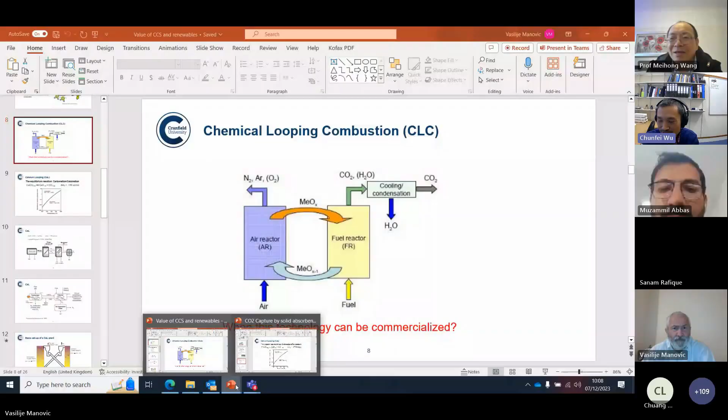So Professor Manovic, thanks, and yeah, I can see your slide. Yeah, thank you, I'm just trying to set up everything so it works. Excellent, you can start.

Thank you again to Meihong for the good presentation, interesting with a lot of data, and for talking a bit in general about carbon capture and storage. I also wanted to give a brief introduction about carbon capture and storage, but I didn't want to repeat too much of what you already heard, so I was rearranging my slides during the previous presentation. First, let me introduce myself. I'm Vasilije Manovic, professor at Cranfield University since 2013.

Before that, I worked for 8 years in Canada for CanmetENERGY, which is a government research institute belonging formally to their Ministry of Natural Resources. Before that, I was working in Serbia, where I was born and got my PhD, and left in 2005 as a lecturer or assistant professor.

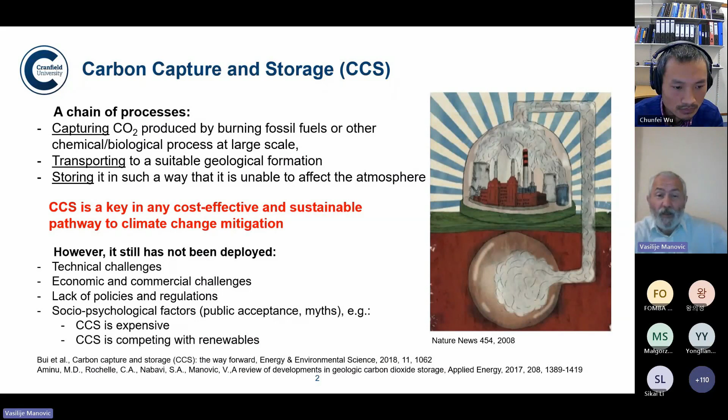And finally, social and psychological factors, such as public acceptance, or what I consider myths - that CCS is expensive, or that we have no technical solutions for CCS. Those are only myths, used by those proposing competing strategies - instead of CCS, we can do something else. You will often hear CCS is competing with renewables. It's a fact, yes, there is competition - competition for resources, competition for funding. But the goal is the same. CCS and renewables - we need both of them to achieve sustainable decarbonization of the economy. I will come to this point a bit later.

So why do we need CCS? I show this example, and I intentionally use something published 10 years ago - nothing has changed even now. For example, when you look at predictions from 2013, similar predictions hold now. The fact is that global electricity demand is growing. Renewables or nuclear can only partially solve issues related to increased carbon dioxide emissions.

Surprisingly, even if we talk about phasing off, or some calls now to ban fossil fuels totally - which would be simply impossible to run the economy by banning fossil fuels - regardless of all that, the reality is we still haven't reached the peak production of fossil fuels, although we are talking about reducing their extraction and use. In the future, it's expected we'll use even more natural gas, which also contributes to CO2 emissions if used for electricity generation.

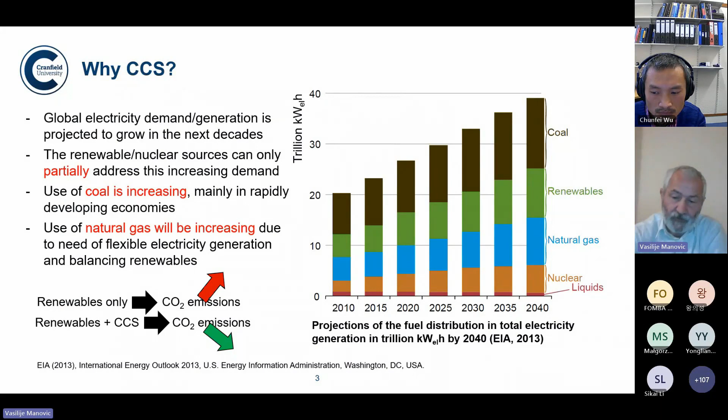This slide shows what we believed 10 years ago about CCS technologies we were considering. Even at that time, amine scrubbing, solvent-based scrubbing, was already commercialized technology. The technology I'll talk about today is solid sorbent-based CO2 capture. We believed that needed to be commercialized at least 7-8 years ago. You'll see later we're going towards commercialization of such solid sorbent-based technologies, but we're still not at the scale we wanted. There are other technologies too, and in general, I think with CCS we are behind the schedule we forecasted and wanted.

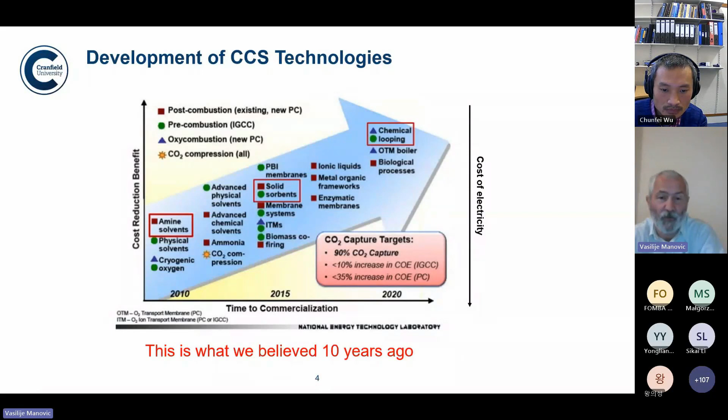You already saw this slide, so I won't talk much, but I want to put calcium looping technology in the context of how we consider carbon capture and storage. In post-combustion, we have a power plant generating heat, using that heat for a steam cycle to generate electricity. We do business as usual, and after that we have CO2 separation - this is the retrofitting scenario. We can have amine scrubbing, but also calcium looping, which is the second generation of carbon capture technologies. We wanted to develop second generation technologies to reduce costs and diversify capture technologies, because no single technology is best in all applications. So for post-combustion, we retrofit a capture plant that could be calcium looping based.

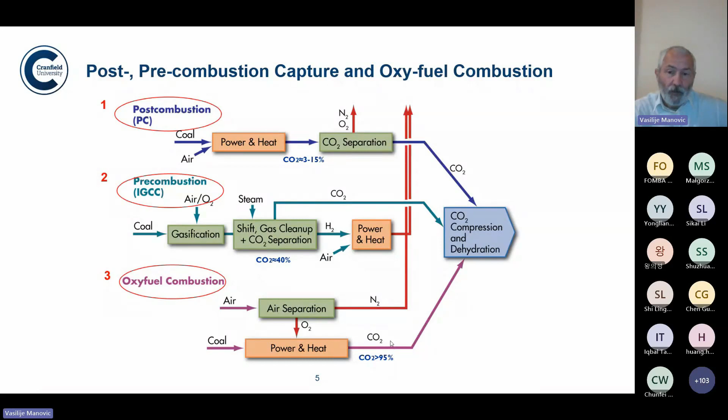When we talk about solid sorbents for CO2 capture, many have been considered and developed - you can find thousands of papers on different natural and synthetic sorbents. My aim isn't to discuss the many options found in thousands of published papers. I'd like to say that one important property of materials we use for carbon capture is their cost - that they're available, abundant, and environmentally friendly, so we're not using materials to capture CO2 while causing other environmental damage.

In calcium looping technology, we use limestone as a natural sorbent - 10% of sedimentary rocks are limestone. We can also use dolomite or magnesite, but limestone is simply the most tested and cheapest sorbent for CO2 capture in these processes. These processes are efficient - they can separate 95%+ of CO2, and their main advantage is low energy penalty for carbon capture, which we'll see later how. As I said, why develop second generation technologies like calcium looping when we already have commercialized carbon capture? Because we're looking to reduce costs. We have many solid sorbents usable at low and high temperatures, and calcium looping is a process where carbon capture happens at high temperature - 650 degrees - which is one of the advantages, and we'll talk about that in more detail.

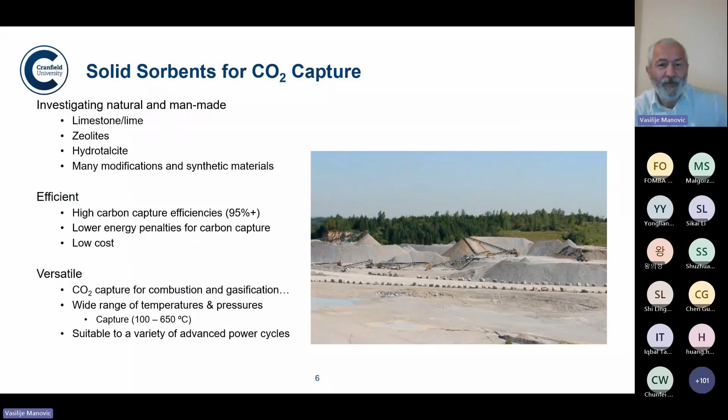So the process is relatively simple. It's based on a reversible chemical reaction of decomposition of calcium carbonate, producing calcium oxide, lime, and CO2.

So how do we run that process? This is a phase diagram of the system containing calcium oxide, carbon dioxide, and calcium carbonate. With increasing temperature, calcination reaction will be happening. With reducing temperature, we can run the reverse reaction.

Which we call carbonation. So usually in this process, depending on what CO2 concentration is in the gas we are processing, but for example, if CO2 concentration is 10%, we can go in carbonation. That means the reaction to capture CO2 can go up to 700 centigrade.

When considering calcination, we want a gas containing, say, 95% approximately CO2, and if you look, the minimum temperature must be somewhere here, which is 850. But that's from a thermodynamic point of view. From the point of view of kinetics of chemical reactions and the intensity of the process, we usually go up to 900 centigrade.

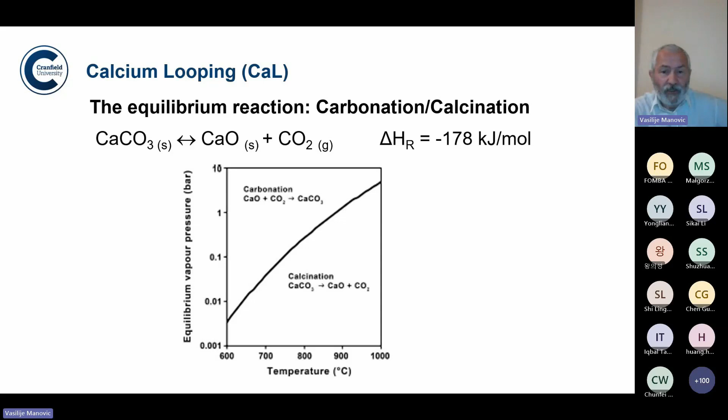We run sorbent regeneration reaction, which we call calcination. So the process is schematically presented here, and as you can see, we have two main reactors, which is carbonator and calciner.

In carbonator, we operate at 650 centigrade. In that reactor, we have calcium oxide reacting with CO2, and the saturated sorbent is basically what we call partially carbonated calcium oxide, because this reaction never fully happens - it's never going to reach 100% conversion. So that's one reactor.

We circulate material from carbonator to another reactor, which we operate at, as we said, 900 centigrade. In that reactor, we have decomposition of the partially carbonated calcium oxide. We decompose calcium carbonate and produce CO2.

CO2 now - we need to heat this reactor. We need 900 centigrade, and we cannot afford to heat this reactor like we usually do in a power plant, by air. We need pure oxygen, because if we have air and fuel here - coal, or it could be any fuel, natural gas, whatever - we need pure oxygen so that we don't dilute CO2 by feeding this reactor with air, because in that case we would produce a mixture of CO2 and nitrogen. We don't want that. We want, say, 95% plus CO2 produced.

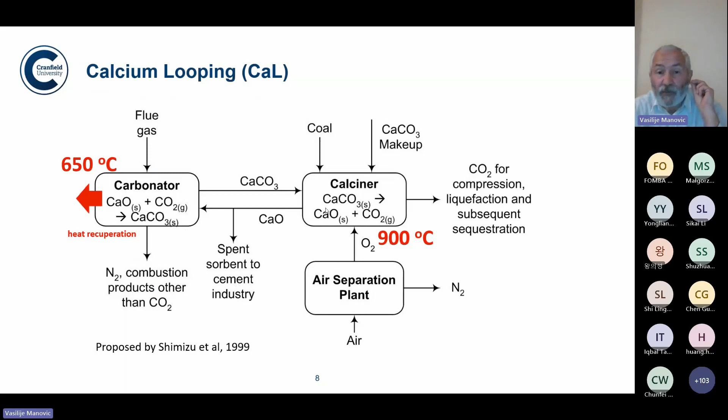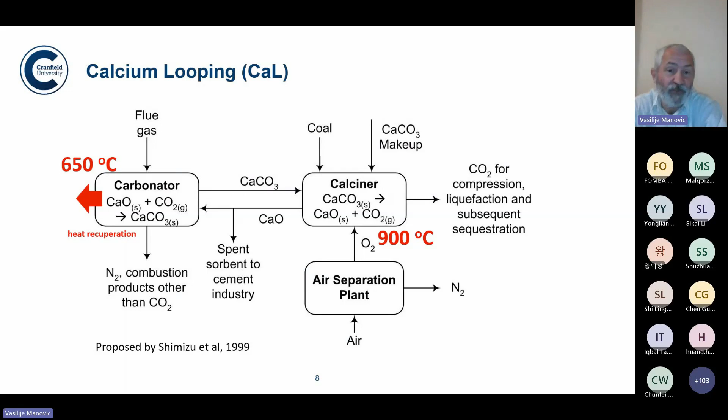A few synergies with other processes, as I said, such as the cement industry, iron and steel industry, because we are using the same process to decarbonize existing gases from those industries containing CO2, but waste from the calcium looping process we use as feedstock in that industry. So basically, in those scenarios, we even have no cost for sorbent because we just use that anyway in those processes.

So this is just a simple schematic representation of the process. Usually we have two fluid bed reactors, as we said, carbonator, feeding flue gas - or it can be any gas containing carbon dioxide. It reacts with calcium oxide, with solid particles of calcium oxide, and during that reaction, calcium carbonate is produced.

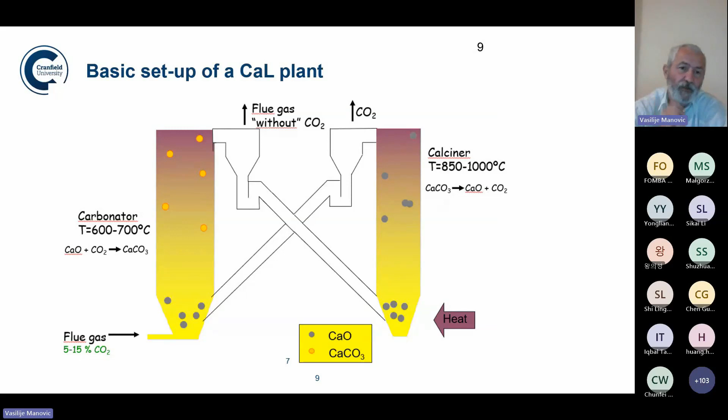In these transfer pipes, material is transferred to the calciner, where we need heat to increase the temperature, on the order of 900 degrees, and CO2 is produced. Solid material is then circulated back to the carbonator. That's a simple schematic representation of how the process basically works.

So what are the main challenges? First I'll mention some benefits. Already mentioned, inexpensive sorbent, usually considered to be around $10 per ton, so a very inexpensive material to be used for carbon capture.

The main components needed to design a calcium looping system are already commercially available. When I say main components, I mean fluid bed reactor systems. Another advantage is low projected cost for CO2 capture. Even during the previous presentation, I mentioned in some applications, 20 dollars per ton of CO2 avoided.

There's already been discussion during the previous presentation about how accurate we are about these costs. We've done probabilistic analysis of techno-economic studies of calcium looping. We are very accurate with process simulations, on the order of a few percentage points, but economic assumptions are critical. We compared this in one paper, published in Applied Energy in 2017.

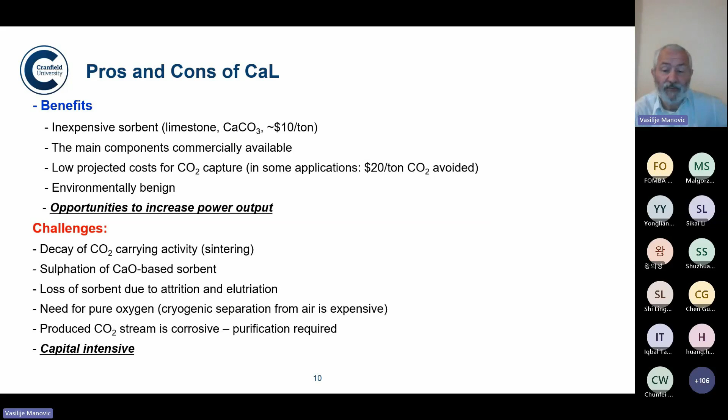This technology is also considered capital intensive, because you've coupled fluidized bed reactors, so it's not cheap to construct. But we will see again later, it's not necessarily always a capital intensive process. In some cases, we already have some reactors in the system that we can use, not necessarily always needing to build new reactors.

If you expose material to say even 1,000 cycles - there have been publications where researchers were testing material for 1,000 cycles - usually at the end, activity is 7-8%. So you cannot use material which is only 7-8% active. The solution was to make up always fresh material and to purge a portion of material from the process.

But this increases the cost of the process, especially in scenarios where we have no market to use that spent sorbent that we purge from the system. For example, in the case of power generation, we usually don't have the opportunity to use spent sorbent for something, and we need to think about other solutions.

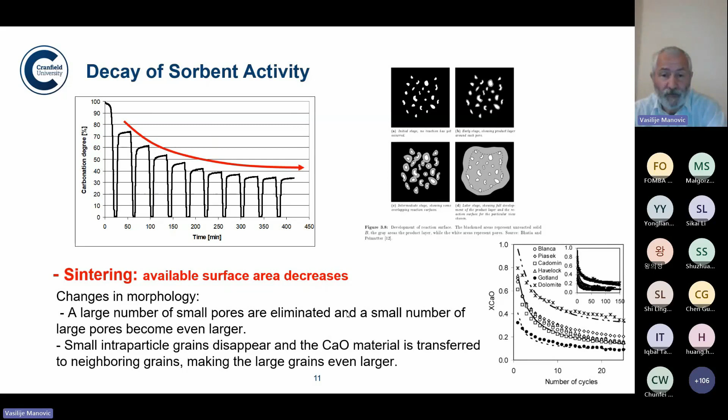Another interesting thing about solid-based sorbent, specifically calcium oxide, is that when we look at the kinetics of the reaction, we have two stages. At the beginning, if we expose calcium oxide at high temperature to CO2, it reacts very quickly in the first few minutes. But after that, there is almost no reaction, or a very slow reaction.

So at the beginning, we have a reaction rate controlled reaction, and when we are designing processes, we only consider this, because it would not be practical to wait for days or hours to capture a few more percentages of CO2. That second stage is slow and diffusion controlled.

So what's basically happening? Just imagine a surface of calcium oxide - doesn't matter how it looks, porous or just a flat surface. At that surface, when you start the reaction, you have direct access of CO2 molecules to calcium oxide. Therefore, quick reaction at the beginning.

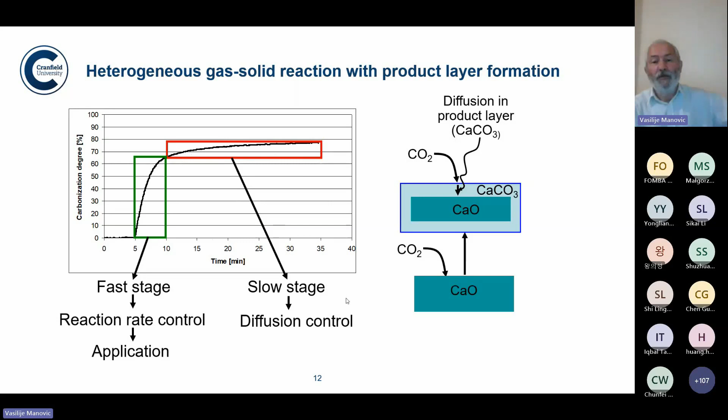So that's about sintering and loss of activity.

So from the point of view of CO2 capture using this sorbent, it's not a good thing to have sulfur dioxide. But if you already have sulfur dioxide, it's good news that in the system you have calcium oxide to remove that sulfur dioxide. This just means we would need a bit higher makeup ratio of fresh sorbent.

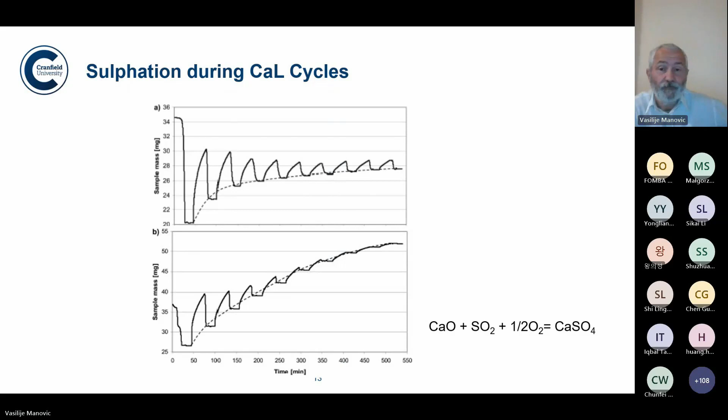Another possibility to recover the material, to increase activity after it's spent, is hydration. Just to give you some ideas of what we have been doing, how we were trying to improve material performance in the calcium looping system.

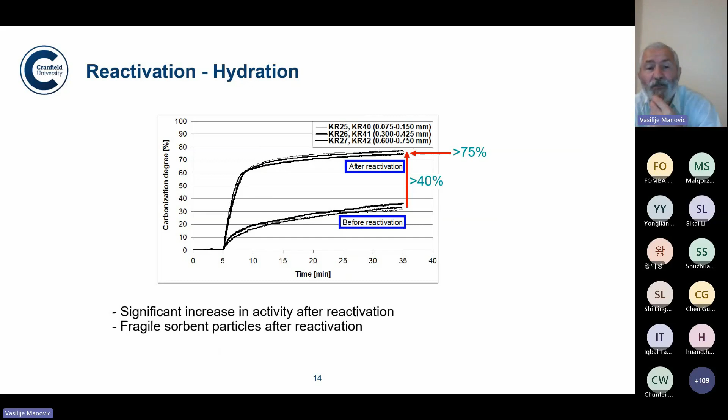The same samples, when exposed to steam, performed the same, if not better, than fresh material. So that was one of the main reactivation techniques we considered. But the main problem when you reactivate calcium oxide with steam is you get fragile, fluffy particles that you cannot handle in a fluid bed. It would be elutriated. So we needed something more to do, not only to hydrate and reactivate by hydration.

One idea was using pellets. That was one of the first tests, even just to try whether it would work at all, and we were doing that by hand, so you see some pellet particles. But when we found that it worked, we improved mechanical strength of particles and improved activity by hydration.

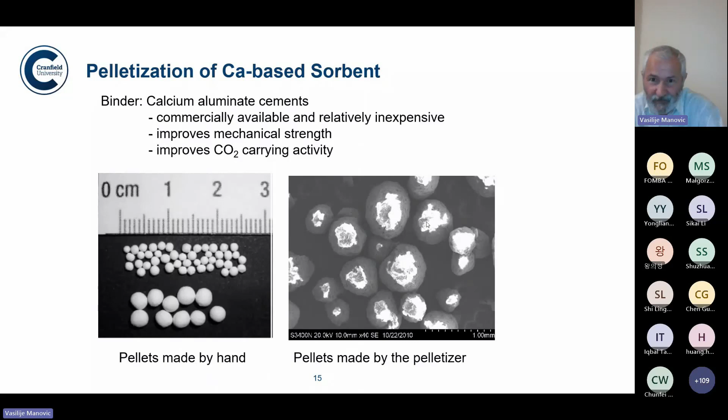We had commercially available and inexpensive binders we could also add to improve mechanical stability, such as calcium aluminate cements. We started producing this material in a kind of mechanical pelletizer, and you can see how it looks in this photo and schematic representation of the process. We have this vessel where we add the material we'd like to reactivate and pelletize. We have blades, one at the bottom and one on the side wall. With these blades we can control speed of rotation and how much water we're adding, and by those parameters we were able to control the particle size of material we were producing. Particle size of pellets is important if you have fluid bed systems.

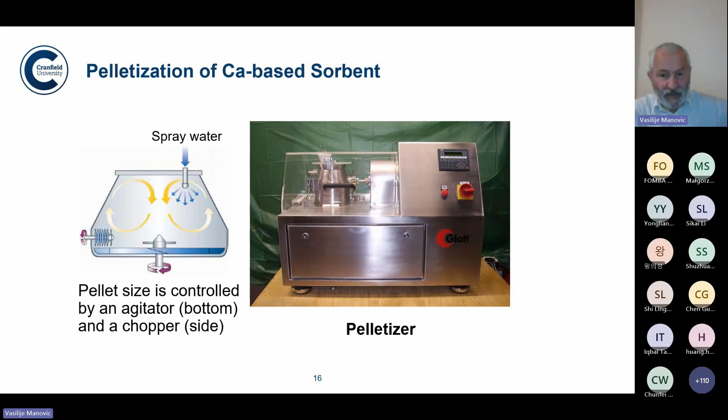At that stage of development, we were thinking, okay, now we've enhanced activity, and many good things I mentioned already. But we thought, why not, since we're now making new material from powder, add even something else into that material. And we considered catalysts or even oxygen carriers.

I won't talk much about catalysts, but the story is this: if you have a process that needs something to capture CO2, a sorbent for CO2, but you also need a catalyst in the system, you can put them together in the particle, to have a composite particle with sorbent and catalyst.

But more interesting was adding oxygen carriers. What was the point of oxygen carriers? If we have a particle which is partially carbonated, CO2 is captured, and we need to regenerate it - if we have a metal oxide which would react with fuel, usually methane or natural gas, during that reaction the fuel reacts with the metal oxide, heat is generated, and we can in that way regenerate the sorbent.

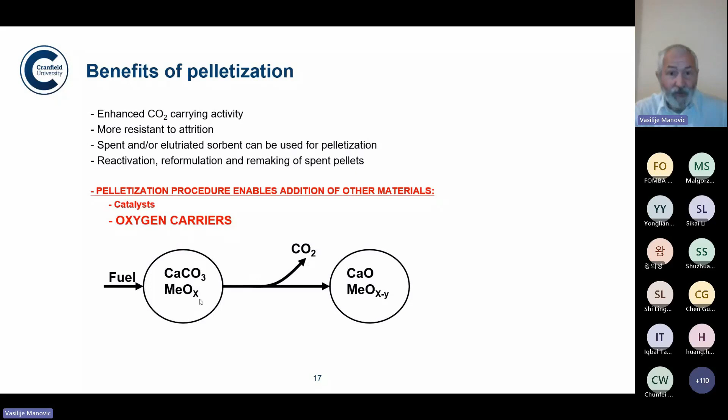So that was interesting, what we were doing. When considering what oxygen carrier to mix with sorbent, these are some criteria we considered: we didn't want our oxygen carrier to be toxic, because handling that in a fluidized bed and due to elutriation could cause environmental, health and safety issues. We also needed to consider oxygen transport capacity, because more oxygen and more exothermic reaction would mean less oxygen carrier you need to add when mixing with sorbent.

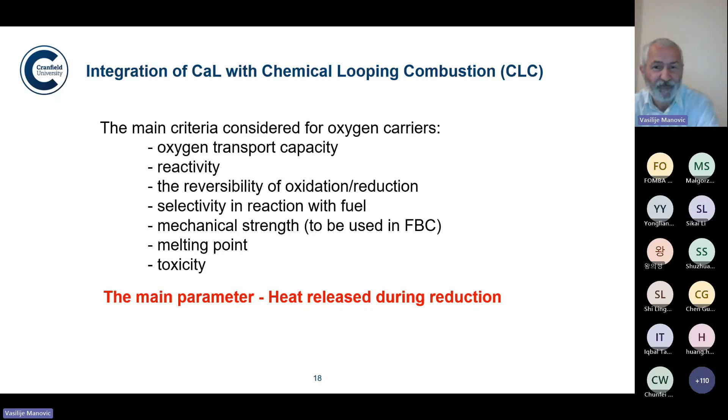What we were still able to do with solid sorbents during the pelletization process was produce a core containing one kind of material - usually we wanted this core to contain material that's more expensive, so we don't lose it from the system, or if we couldn't avoid something toxic, like a toxic catalyst, to put it in the core with a kind of shell around it. So we developed a technique to produce core-in-shell sorbent materials for CO2 capture, and composite materials containing catalysts or even oxygen carriers. This is a scanning electron microscope image of the shell.

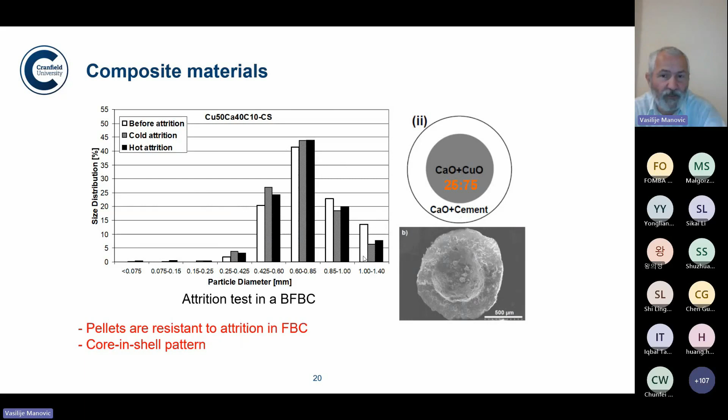As I said, I will not be mentioning all materials, as it would not be feasible to talk about all of them. I will not be mentioning many technologies for many projects where we already have a demonstration of a calcium looping process.

One of the first demonstrations at the beginning, we were developing this process for power generation, to decarbonize power generation. One of the largest projects, 10 years ago, was a 1.7 megawatt calcium looping capture plant, which was used to decarbonize real flue gas from a 300 megawatt coal-fired power plant, and that was demonstrated.

As I said already, we needed to look for more opportunities for this technology, because power can be produced in many different ways, but we have technologies that cannot be easily decarbonized, and they are carbon intensive. One of the recent projects is CLEANKER, how we can decarbonize cement industry using calcium looping.

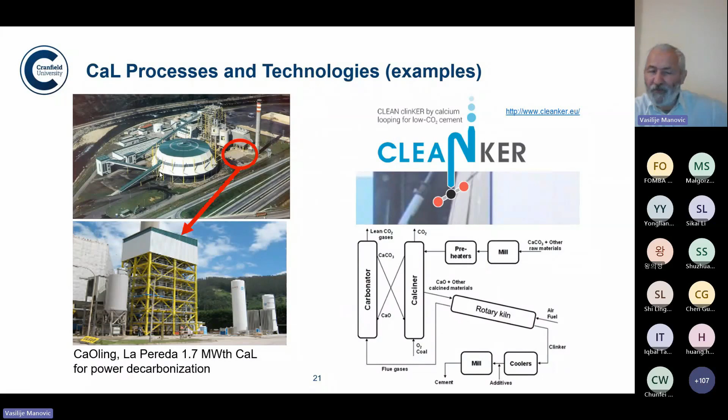When we heat integrate, because these two reactors operate at high temperature, and the rotary kiln also operates at high temperature, more than 1000 degrees, you have huge savings because your lime is already preheated. You don't need any heat to calcine your lime in a rotary kiln. These are just examples of how we were changing our focus from power generation to industrial decarbonization using calcium looping.

About those large projects, I wanted to mention our current project at Cranfield University, the HYPER project. Previously we talked about calcium looping for pre-combustion, and even from the beginning, from my slide, you saw that we have three scenarios for carbon capture, and that was calcium looping in a pre-combustion CO2 capture scenario.

But now we usually call that sorption enhanced steam methane reforming for blue hydrogen production, because now it's attractive to have processes to produce hydrogen that can be used to decarbonize many different processes and technologies.

Basically, the summary reaction of what's happening in this process, which we are now building and should be commissioned at the beginning of next year and tested during next year, is that we use natural gas with water, and it reacts with this solid sorbent, calcium oxide, producing hydrogen and calcium carbonate, which is going to be regenerated in the calciner. So the process is basically the same, just with a different gas mixture.

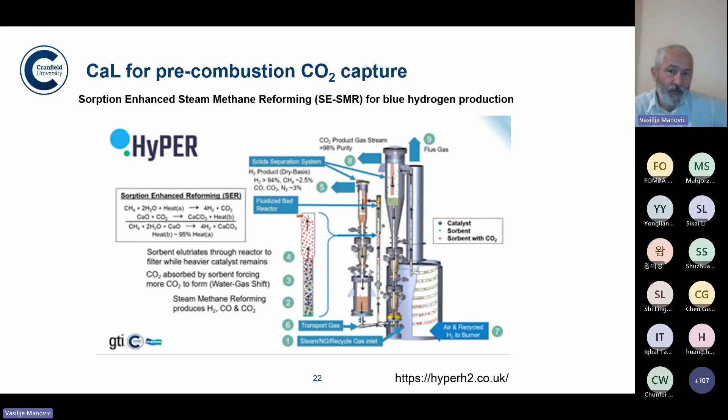In this case, we are taking CO2 from the sorption enhanced steam reforming gas mixture. I think we have no much more time to talk about the details, but I just wanted to show you another application of calcium looping, which is again going to be demonstrated at a megawatt scale.

Finally, when talking about economic evaluations, the main thing when comparing CCS, calcium looping, or any other technologies that's supposed to be deployed or commercialized, we always can see—I don't know why it's happening, I really have no explanation—we are comparing technologies based on levelized cost of energy or levelized cost of CO2 avoidance or something like that.

But we really need to be comparing technologies based on their value. For example, what's the value of variable electrical output? It could be very cheap, there's no dispute. But what's the value of that when compared with power generated, for example, in a natural gas-fired power plant with carbon capture and storage?

That you generate that electricity and change the load, changing output when you need. In the former case, you don't even need that. Just to be clear, in the case of variable output, you need something such as energy storage, or to balance that by flexible generation, using fossil fuels such as natural gas. That's another reason why, even in the case of high penetration of renewables, we still need CCS and technologies such as calcium looping to balance energy grids.

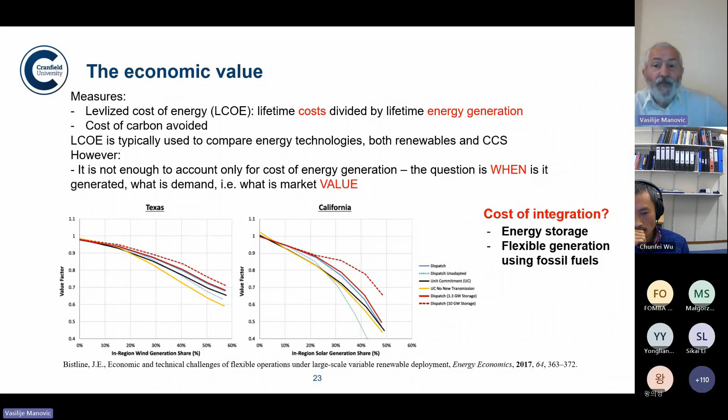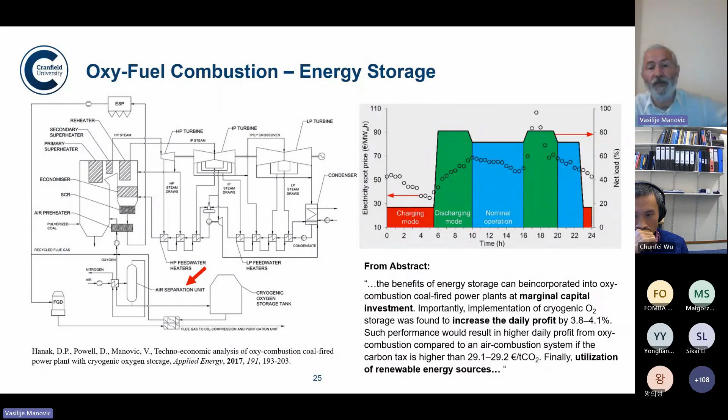So to say only that carbon capture and storage is expensive, that carbon capture processes are expensive - I wanted to remind you with my first slide that it's not necessarily true that carbon capture processes are expensive or not economic.

This is another opportunity, again published, where we demonstrated, with realistic, not optimistic assumptions, that we can decarbonize the iron and steel industry at a cost for CO2 avoided of order of magnitude 15 euros, dollars, whatever, per ton of CO2 avoided, which is already commercially and economically viable now.

We proposed exploiting synergy between processes, because in a lime production process you already have a lime kiln, which is a calciner, and you need lime in the blast furnace. If you just add one more reactor, one more vessel, which is a carbonator, you reduce the capital costs of the technology, and you decarbonize the whole process. From that calcium looping process you have feedstock for the blast furnace, lime for the blast furnace, so there is no waste from this process.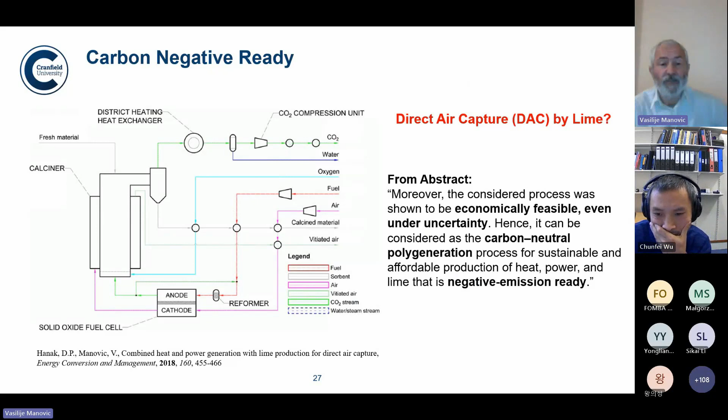And economic analysis is showing that this could really be cheap, not expensive. About carbon negative technologies, we won't talk much now, because Mei Hong already mentioned them, but we had some ideas.

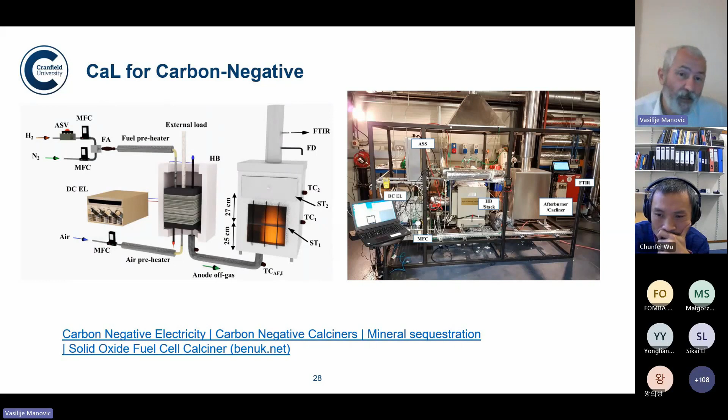If we produce, by a kind of calcium looping system with carbon capture, cheap lime - not expensive lime, but also what we call carbon negative or carbon neutral lime - that carbon neutral or carbon negative lime from this process can be used to decarbonize many other industries just by using that material. So I think I finished, and I don't know whether there is any time for questions. I'm very happy to discuss or answer any question.

We can use it even for direct air capture, and it's on these slides - direct air capture. Once you produce lime, you can expose it to capture CO2 from air, and that's already being commercialized, at room temperature. Yes, we are also working in that area.

So probably I have one question. You mentioned that the produced CO2 is corrosive - can you elaborate on that a little bit more? CO2 from the calcium looping process is corrosive because in the calciner you have oxy-fuel combustion, so you definitely have oxygen. Another thing is if you are using fossil fuel, which in most cases you have steam - you are generating steam, so you have oxygen, steam, and some sulfur dioxide will be in the system.